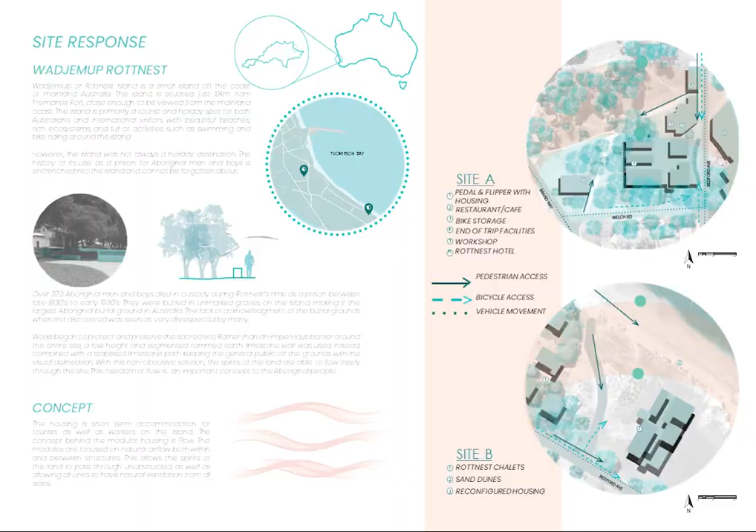The concept behind this modular housing design is flow. The modules are focused on natural airflow, both within and between structures. This allows the spirits of the land to pass through unobstructed, as well as allowing all units to have natural ventilation from all sides. The housing is placed on top of the redeveloped two-story pedal and flipper structure.

The first and second level of modules have the same configuration stacked directly on top, followed by a roof module for each apartment. Planters and communal spaces with tables, seating, and barbecue facilities are located on the walkway between modules.

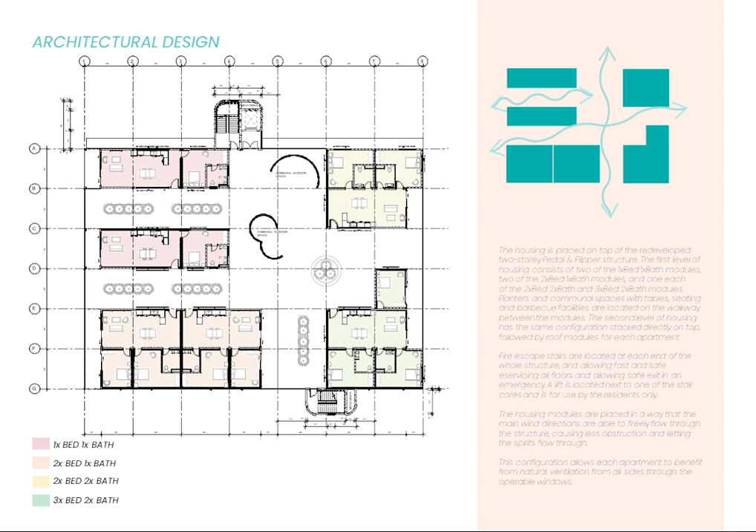The housing modules are placed in a way that the main wind directions are able to freely flow through the structure, causing less obstruction and letting the spirits flow through. This configuration allows each apartment to benefit from natural ventilation from all sides through the operable windows.

The different apartments are made out of a combination of 4 different modules. Each apartment has a living space module that is paired with different bedroom modules to suit the apartment's size and function. A separate roof module is fixed onto the topmost apartments.

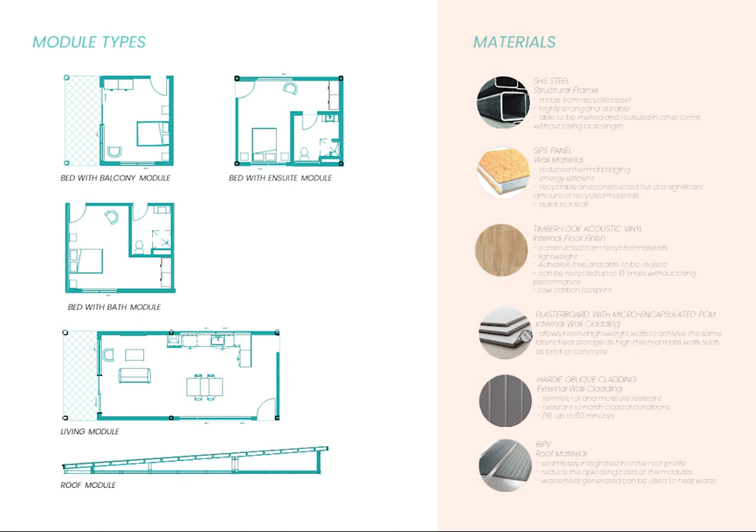The finished materials selected are lightweight and durable, with the ability to be reused, recycled, and/or repurposed to work towards a circular economy. The modular apartments are constructed of 200 SHS steel beams and columns, with 100 PFC floor and ceiling joists. The consistent use of these structural members allows each module to fit together easily and provides for flexibility in design combinations.

The modules are connected through a bolted sleeve system. The upper half of one module provides a welded SHS sleeve on its extended columns that allow the lower half of another module to slot in and be bolted together. This leaves space between the ceiling and flooring for services.

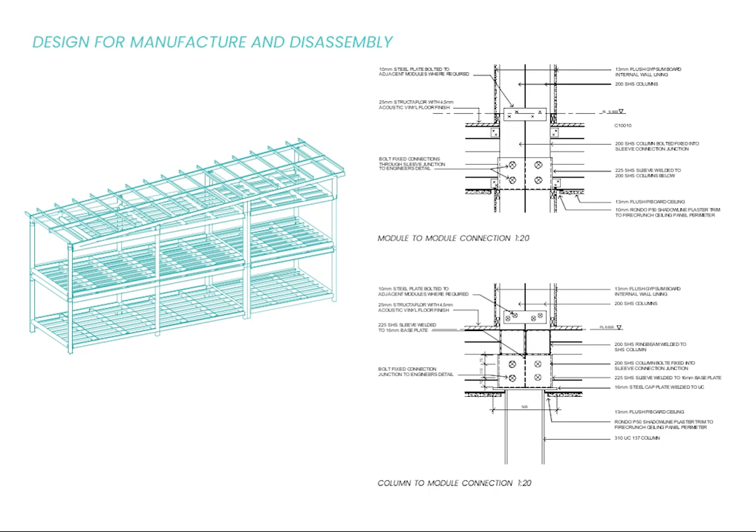When it is time for the modules to be relocated to Site B, they are simply unbolted and lifted onto a truck to be transported. All modules are built to a 5 meter by 6 meter grid. This allows for flexible rearrangement, as even the walkway modules can be reused in a different configuration.

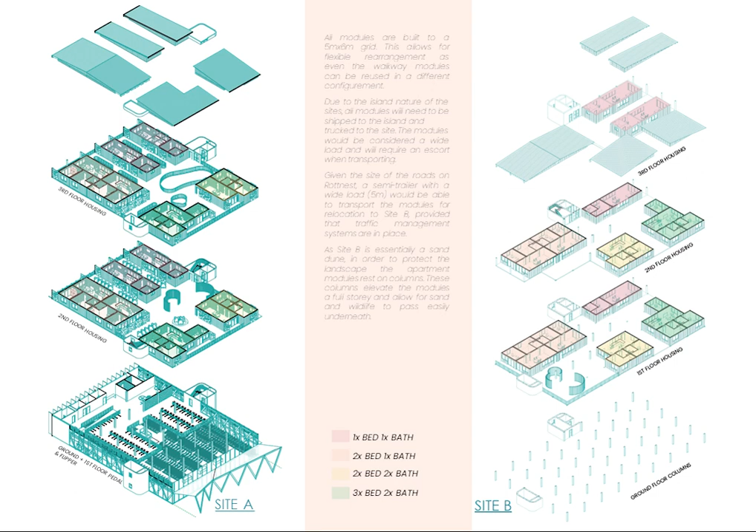As Site B is essentially a sand dune, in order to protect the landscape, the apartment modules rest on columns. These columns elevate the modules a full story and allow for sand and wildlife to pass easily underneath.

Innovative materials and passive design features are used throughout the modules. By microencapsulating phase change materials into the internal plasterboard, the lightweight walls can achieve the same latent heat storage as high thermal mass materials, such as masonry. With this, the structures are able to stay cooler during the hot parts of the day and can give heat during the cooler parts of the night.

BIPV is the integration of photovoltaics within the envelope of the building. The PV panels seamlessly integrate into the roofing system, making them ideal for individual roofing modules that may be detached and reattached in a separate location.

The PV system allows the modules to generate their own electricity to be stored in an on-site solar battery, and the waste heat generated can be used in heating water.

Hydronic underfloor heating is a water-based system that uses sealed pipes of heated water to radiate heat from underneath the floor material. This method of radiant heating allows for more evenly distributed thermal comfort. As a closed system, the water is reused. This heating method can be integrated with the solar PV roof systems to heat the water and reduce operational costs.

Structural insulated panels are load-bearing while providing the bracing support that the framing is missing. SIPs also provide effective thermal performance and are light and relatively inexpensive, making them a good material for fast construction.

Glass wool insulation is produced from recycled glass that has been spun to create fibers. This traps heat and allows the internal spaces to be kept cool in summer and warmer in winter. The insulation is fire-resistant with high thermal and acoustic performance and is 100% recyclable.

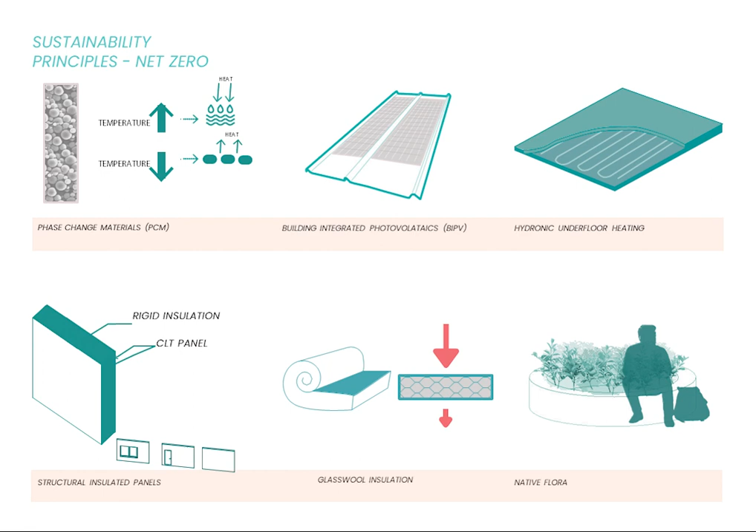The facade screen is a perforated aluminium panel with larger organically shaped perforations that prevent direct sunlight from entering into the living spaces, while still allowing daylight, ventilation, and access to views. They are located on all facades except for the south, which does not receive any direct sunlight. They are positioned in front of windows in each module for both shading and privacy.

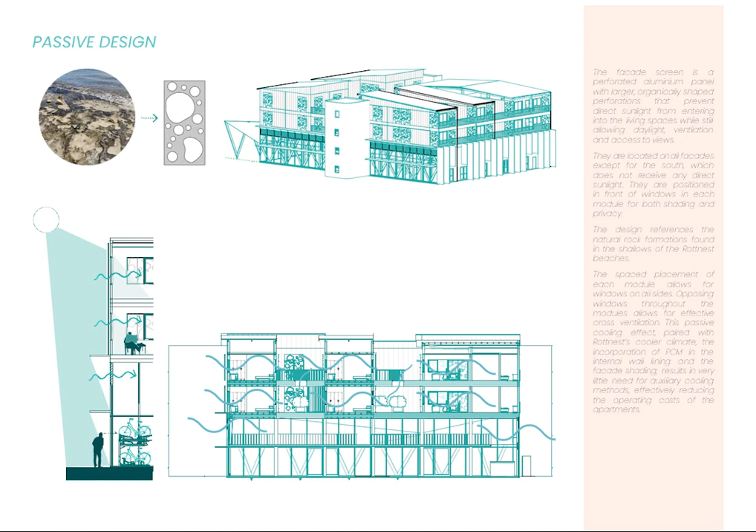The design references the natural rock formations found in the shallows of the Rottnest beaches. Opposing windows throughout the modules allows for effective cross-ventilation. This passive cooling effect, paired with Rottnest's cooler climate, results in very little need for auxiliary cooling methods, effectively reducing the operating costs of the apartments.

The solar PV roofing system is linked with the hydronic underfloor heating system. The waste heat generated from the solar panels is transferred into water pipes that carry the heated water to an exchange tank that facilitates the hydronic system.

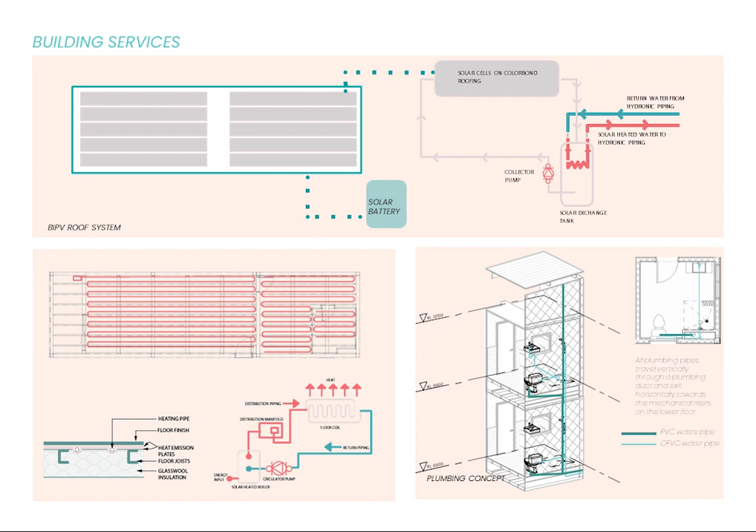All plumbing pipes travel vertically through a plumbing duct and exit horizontally towards the mechanical risers on the lower floor. When reconfigured, these ducts will still line up.